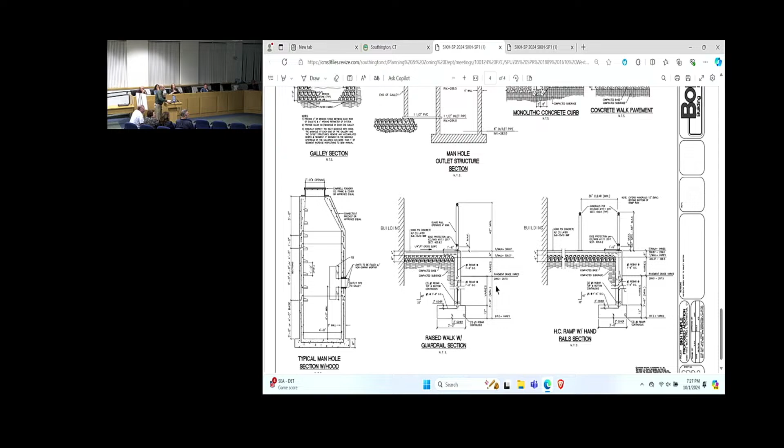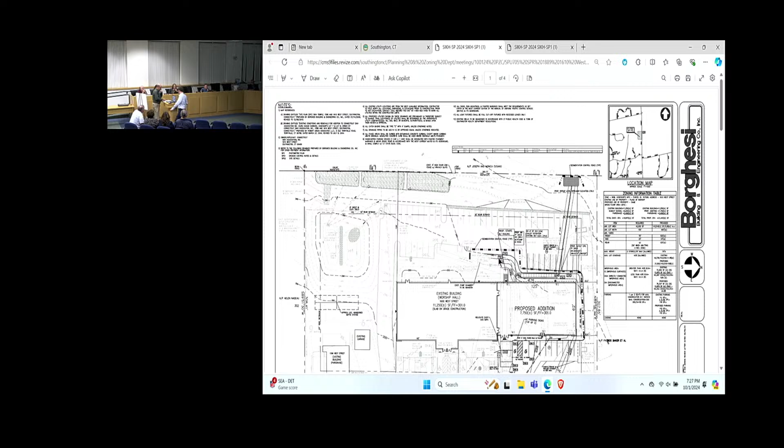Those are all going to be combined into—the floor plan was submitted as part of that package. I think you only revised certain sheets. Oh, the ones from today. Yeah, I don't see a floor plan up there. Sorry.

That's 7 sheets, I think it's going to be. Okay. The entire addition we're looking at putting on is within the grassed area and the area over the top of where that two-story building is. So all the parking, all the paving around there doesn't really get disturbed—it stays the same as what it was.

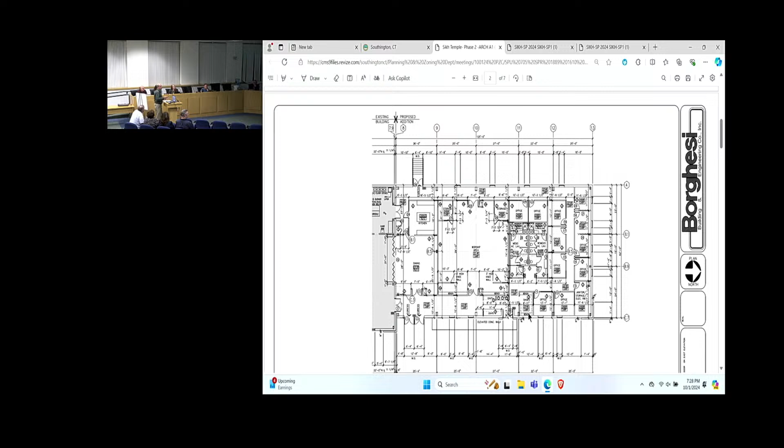The kitchen area that's in the two-story building now, which was a cooking kitchen, is part of the existing building in the back. So in this area, to make life a little easier, they're going to have some additional dining area here, which opens up into here. They're going to have a small warming kitchen in the back, since they already have this kitchen right here where all the cooking's done—so just a little warming kitchen area.

So that's the dining area, plus additional worship space here, and then the offices are all going to move around the perimeter out here, coming from the two-story building.

We did get comments from Jim Grappone—we got those yesterday afternoon. We did address those, and I'll just run through them quick. I'm not sure if anybody had a chance to look at them since we got the comments yesterday. We did it today and sent them in this afternoon. So these were the only outstanding issues.

Per the applicant, the building will be slab-on-grade construction—that's correct, everything on the upper level. The existing building will be demolished. Please add the demolition utility notes and start and anticipated completion dates to the sequence of construction on SPD 1, which we did and resubmitted.

Stormwater maintenance plan shall be included in the site plan—we also did that and uploaded it.

Per the applicant, the lower two accessible spaces will no longer be needed and will be removed. They're not really removed—we took the two that were in the back of the property that served the lower level of the two-story building and moved them up around the front of the building, so that'll serve the entrance for the proposed addition, and then just restriped everything. The pavement doesn't really change because all that construction is within the central grass area.

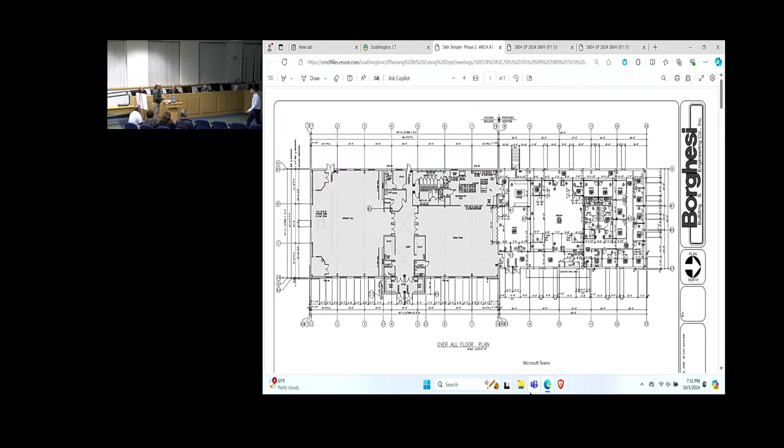So in the original proposal, we had an increase in runoff from building the proposed addition. Per state requirements, to get to a zero increase in runoff, we have a galley that's going to be underground in this back portion.

The original proposal had a separate line going to a level spreader in the back of the property. What we've done now is take that pipe and tie everything into the existing storm drainage system on site, so that area completely goes away. We still have the galley system for zero increase runoff, but instead of creating a new point of discharge, everything's tied into the existing system.

Provide a statement concerning the condition of the existing on-site dry well, the stone recharge trench along the rear parking lot, and the detention basin. If any maintenance is needed, please note that in the report.

We did have the engineer go out there and take a look at it, and I can read you that. The existing detention basin appears to function well; however, existing vegetation on the downslope of the embankment needs to have all trees and shrubs removed. The riprap level spreader also appears to be functioning well. Minor debris in the level spreader should be removed.

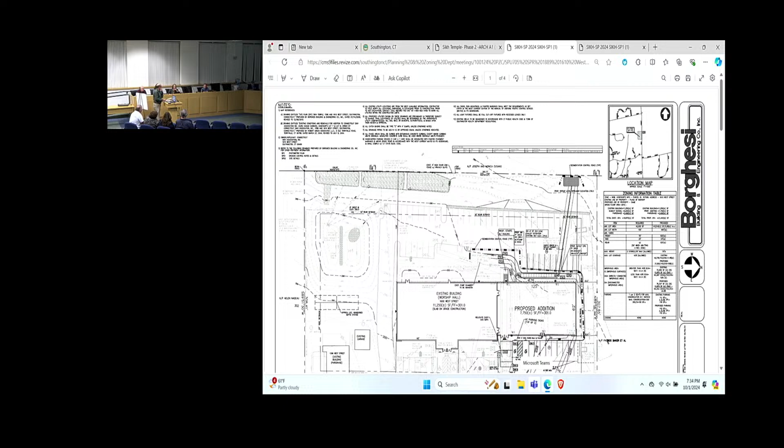Does the proposed slope to the rear of the proposed addition exceed 3:1? If so, erosion control matting is required. There was just a small section there, so notes have been added to the drawing for the erosion control matting, and a typical utility trench detail has also been added to sheet SPD 1. So all of those have been addressed.

I guess I'm not sure if anybody on the commission has any questions. So you're all done with your presentation? I'm done with the presentation. Okay, so let's open it up to members of the commission for questions.

Commissioner Woloski: I'll ask Jim, and I'll ask you as well. So these answers to the engineering questions came in today, so you understand we haven't had a chance to see them. You're familiar with the project. Yes. And you just lightning fast ran through them. We don't have them organized, and you have bullet points all the way down, so we're trying to flip back and forth between both. You didn't put them all in the same place. So there's no way we're possibly going to digest all this information that you just threw at us in about three minutes.

Fair enough? Fair enough. In the future, I'd recommend a question-answer format so that we can read it, especially if it comes in on the day of the meeting. Well, we just got the questions yesterday, and I understood, just wanted to get them understood quick. We're trying to really push this thing through, but it's impossible. So with all that said, I can't even put together a list of questions because it's just too much information right now. Okay, so with that said, I'll let everybody else -- maybe you were able to grab a piece of it, but I'm gonna have to look at this a little bit, I don't have enough time.

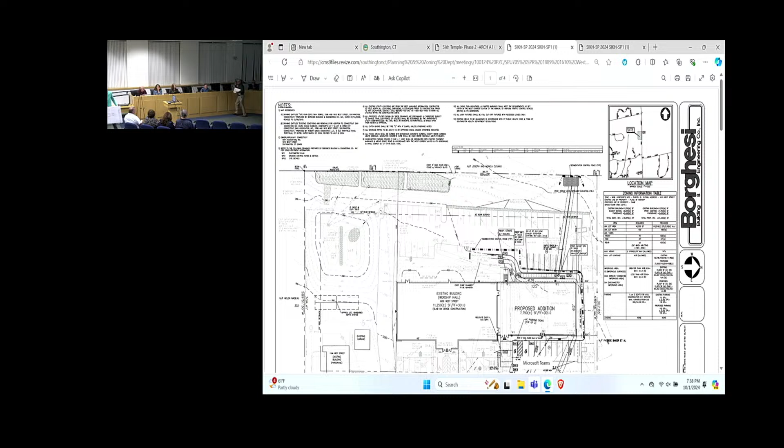Any member of the public who'd like to testify either for or against this application at this time, please come up. Give us your name and address, then share your thoughts. Joe Casano, 90 Welch Road.

I own all the land in the back. I got a little problem with this, but I want you to know I owned a company that did soil erosion for 40 years, so I have a few problems. First of all, the outfall, I understand you guys are getting rid of that, right? Because that would have been illegal. One second, you ask the questions here, he'll come up afterwards and we'll have him answer. I understand they removed that, revised, right Jeremy?

I don't care about the building, do what you gotta do with the building, but they have a drywell there for years that no one's maintaining. It's been clogged with leaves, sticks, and everything. I called for years, talked to Mark Shoda, said we'll take care of it, but no one took care of it. I'm a PA 490 Act farm, state registered. I hay that field twice every year. My tractors get stuck there, stuck in that one little spot, because going back to 2010, Jim knows, we had them put that system in, which works perfect, the other system.

That time, they wanted to point it at one way, and you can't do that. All I'm saying is I got beautiful land. I don't want it wet, I don't want to ruin it. First of all, I do want the fence extended with blinders. And then you got a gravel berm - is that what it is, Jim? That gravel berm where they're parking their cars? That ain't gonna work, their car tires are gonna squish it. That driveway or parking lot water is gonna just go down in my field. So someone's gotta come up with a better system. I'm not gonna tell you how to do it - you guys are engineers. But someone's gotta come up with something better, because if my land gets ruined, we got problems. That's all I'm saying.

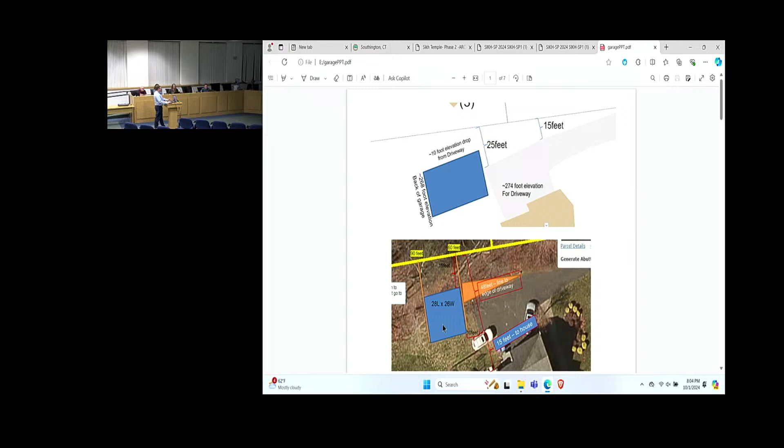With the health department, they asked me to go in and physically measure from the corners, that's how you pinpoint this, and verify where the fields were, to ensure that I had a 10-foot setback. It still allows me 25 and 15 feet of distance from the northern portion of my property. So, just looking for approval or questions or what else.

Okay, you all set, Timothy? Yep, I think so. Okay, any questions for members of the commission for the applicant?

You currently have a 2-car garage? Yeah, it's actually this portion right here that the driveway runs into. This is a regular 2-car garage, yep.

So we'd be having a total of 4 bays? Yep. And 1 neighbor visible with no objections? I would argue the other gentleman I hadn't heard from should be able to see it as well in the winter, but I haven't heard from him. Similar architecture, similar everything? I'm not quite sure. Similar architecture. This is the one I'm working with from the barnyard.

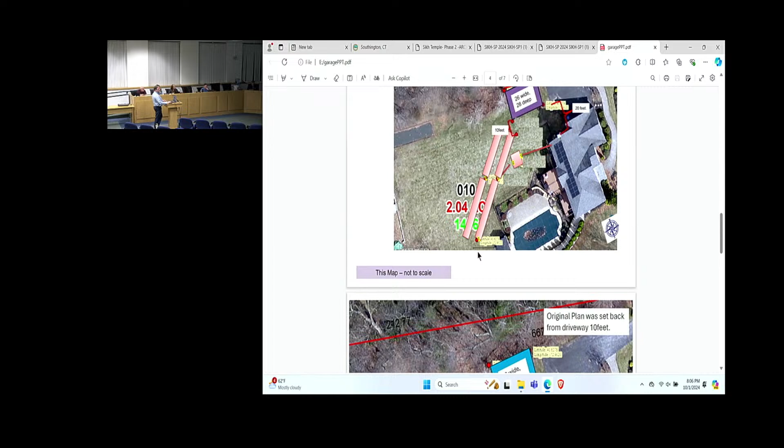Any other questions of the applicant for members of the commission? I have one, Todd. So I was looking in the notes, and it says that there potentially is water that might, depending on which drainage system you use, drain or percolate into the woods. Would that be additional - is there any neighbors near there where that water might go through the woods into somebody's backyard?

The question was straightforward: what do you plan on doing? Based on how my current yard and drainage system works, all my downspouts run off into the woods. These downspouts over here run off into the woods. I answered it as such, and later found out after talking to the engineer that apparently that is no longer allowed. I actually like his recommendation in the new method, which is you create basically a 2-foot by 3-foot drainage up against the garage. Quite honestly, it sounds less expensive to do it that way. So I plan on following the proposed recommendation he provided. He was pretty insightful and helpful on that.

Got it, thanks. No digging for me. Don't blame me. You all set, Todd? Good to go. Okay.

I was going to ask, just to get it on the record from our engineering staff, are we satisfied with the responses to the questions you received from the applicant?

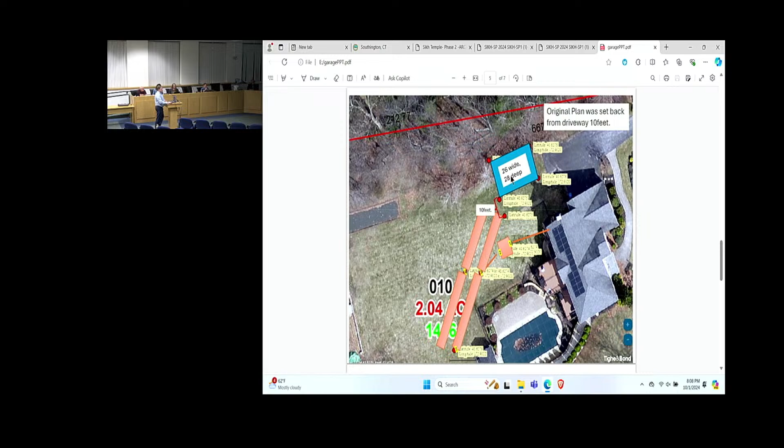The applicant's referring to a stone infiltration trench, so we're in favor of that. It sounds like he still needs to get a concrete person out there to decide on retaining walls, because there is a drop-off. We provided him information on the GIS showing the slopes in the area, so there's a slope, it's not a flat area, so we asked about fill and the amount of fill that's going to be brought in. He still needs to work with somebody on that end, but didn't want to spend the money to go to the next step until he gets a favorable response on his application.

Understood. As the applicant, you understand that what our town engineer is doing is looking out for the best interests of all the people in the town of Southington. Yeah, I'm gonna make sure we get what we need done. I was suggested by the barnyard to double check to make sure I can actually do it before I get it here. I think that's a wise course of action.

But there may be stipulations put on any approval of your application that state you need to work to address issues to the satisfaction of the town engineering department. You understand that, right? Yep. That might happen. Oh yeah, you're okay with that? Oh yeah, okay.

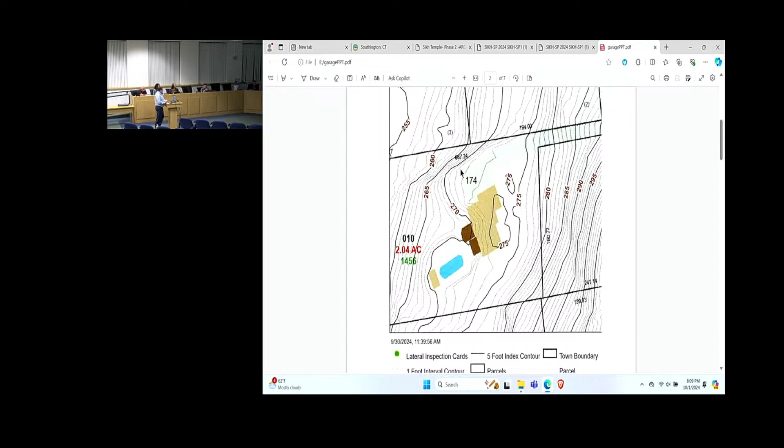I'm all set, everyone else all set? Mr. Chair, any way we can see a picture of your house, Jamie? Are you able to pull that up? Just for the record, was I smart enough to take a picture? In favor of detached garages, especially at this size.

I got the top view. I don't think I have a picture in here, I apologize. What about Google Street? Oh, Google Street actually has somebody else's house. Fun fact. Zillow? Nope. I'm 500 feet from the drive, and it's a downslope - I mean, I lose serious elevation coming down.

That's 100 feet down off this main street, so I come down a lot. And what the engineer was referring to is this actually drops like 10 or 20 feet there, or 10 or 12 feet. I'm sorry, I don't have a picture.

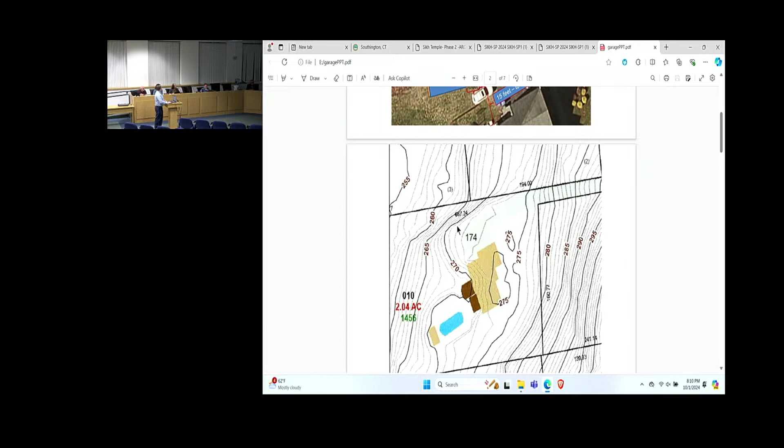I'm looking at a picture online. I'm concerned the picture you're showing us from the barnyard and the color of that pine does not match your house at all.

So I would suggest that you look for a different one of a different color, because that doesn't meet our regulations. We asked for a rendering so we can make sure it matches the house, and this does not match your house.

I'm having a hard time understanding why I am being encouraged to downgrade my potential garage and my future obligation to what I'd like to do to the house. You're not downgrading, but our requirements make it very clear that the garage needs to match the house. And this garage that you're proposing from the barnyard does not match the color of your house.

So if I were to get a lighter tan, closer to that house, would that do the trick? And so when I go back and want to re-side my house, which has really degraded siding, and go to a nice cobalt blue, then I'm also obligated to do that because it doesn't match per the town regulation?

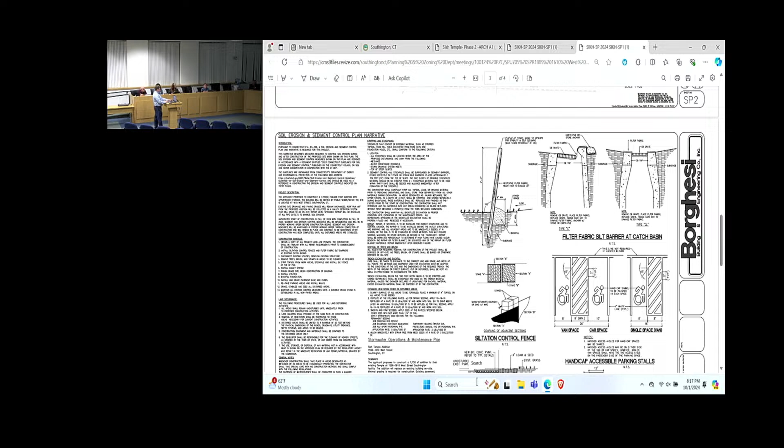Sure, we'll open it up to members of the public to, any member of the public like to testify on this application at this time? Going twice. Anything else you want to add before we close the public hearing on this? Timothy, anything else you want to add before we close the public hearing on this? You're all set, okay. Thank you. Any objection to closing the public hearing here? No good? All right, we'll close the public hearing on that.

We'll move on to the business meeting. Items 10A and B, I'm going to look for a motion to table both of those. We have an open public hearing on both of those. Can we get a motion to table?

Mr. Chair, I'll make a motion to table SPU 696 and SPR 1890, if I can do them together. I think that's fine, yes? Yeah. Do we have a second on that? Second. Commissioner Salmieri with a second. Any further discussion? All those in favor? Aye. Any opposed? Motion carries.

Item C and 10C and D have been withdrawn again, so there's no need to take any action on those. Item 10E and what should be F, although on my thing it's showing up as two E's, but it should be F. This is a Robert Blanchette application that we have a public hearing open on.

We're looking for a motion to table on these two items as well. Yes, Mr. Chair, I'll make a motion to table SPU 705 and SPR 1889. We have a motion. Is there a second? I'll second. Commissioner Chaplinsky with a second on that one. Is there any discussion? All those in favor? All right. Aye. Any opposed?